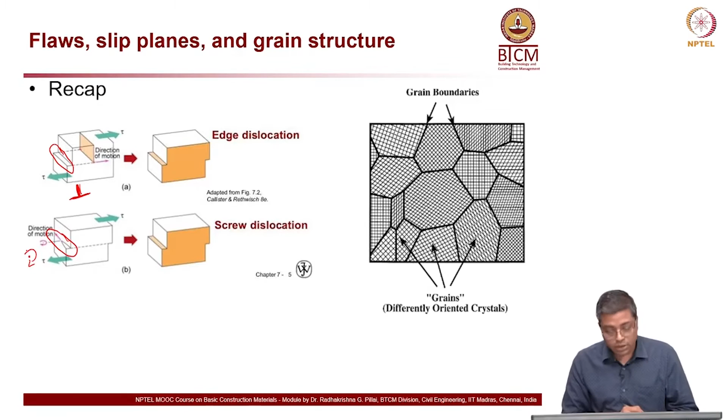Now, how do these slip planes, flaws, and grain structure influence mechanical properties? They do have an influence. Flaws and defects like edge or screw dislocations can be weak locations within the bulk material. Because they tend to be weak, they actually decrease the strength of the material. If there are a lot of defects, flaws, voids, or cracks present, the material will generally have lower strength, and toughness might also be reduced.

This is all associated with the energy required to propagate a crack. If there is a flaw, we can think of it as a micro crack, and there is some energy required to propagate that crack. That energy is the most important thing when we talk about toughness, and it matters a lot in strength as well, because it eventually leads to fracture behavior.

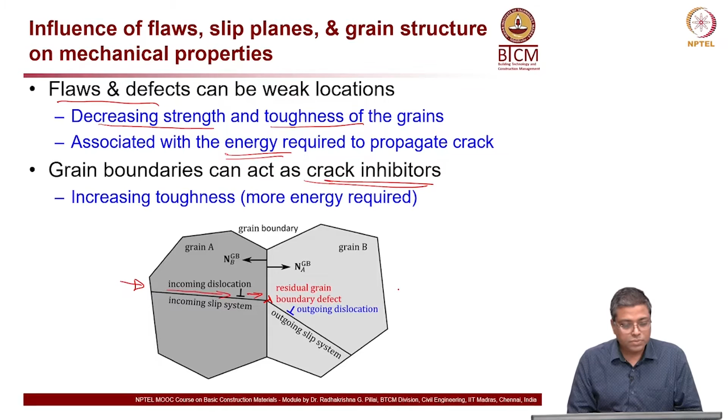Now, effects of slips and grain boundaries — I'll call grain boundary GB here — on toughness and ductility. Atoms at the grain boundaries are at a higher energy state than a particular atom within the grain.

Slips are blocked at grain boundaries. We showed that drawing earlier, repeated here. The slips are blocked because the grain boundary acts as a crack inhibitor, stopping the crack from progressing. But as you apply more stress, there will be a point at which it starts moving in the best possible direction, through the next or adjacent grain available. This process requires more energy, because you have to cross through that grain boundary — you need more energy to deform the material.

Now look at the drawings here. You can see this is an incoming slip plane, ISP, and an outgoing slip plane, OSP. Look at the direction of these arrows.

So these perpendicular symbols are actually the edge dislocations.

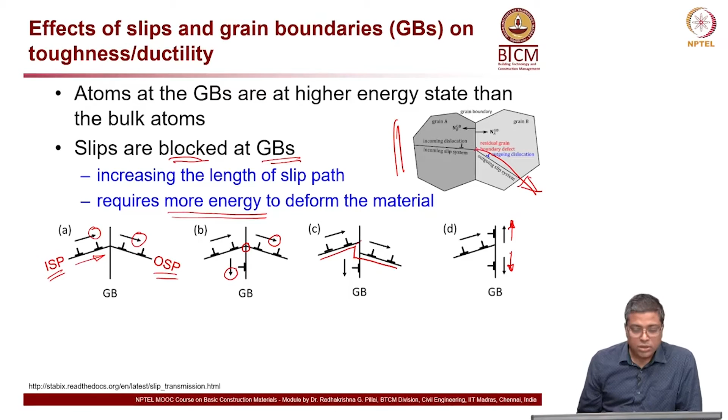Because of this, the size of the grain boundary has an influence on the toughness, we can say that.

Now here, when you look at the left side micrograph, this little straight line is about 100 microns. So you can say the size of this is maybe 1, 2, 3, 4, 5, 6, 7. Let's say 0.8 millimeter is the distance from this point to that point. So you're looking at within a millimeter in size here, not centimeter - within 1 millimeter in size.

Now, on the left side you have larger grains as compared to the image on the right side. Now, when you have larger grains, if you have a crack along the grain boundaries, this is an intergranular crack.

If I measure the length of this red line, the red line indicates the crack, the one on the left side will be shorter than the one on the right side - this is less and this is more. Because when you have larger grain size, the actual length, if you just follow the grain boundary - not the displacement from one point to the other, but the actual length - it will be more in the case of a smaller grain size than in this case.

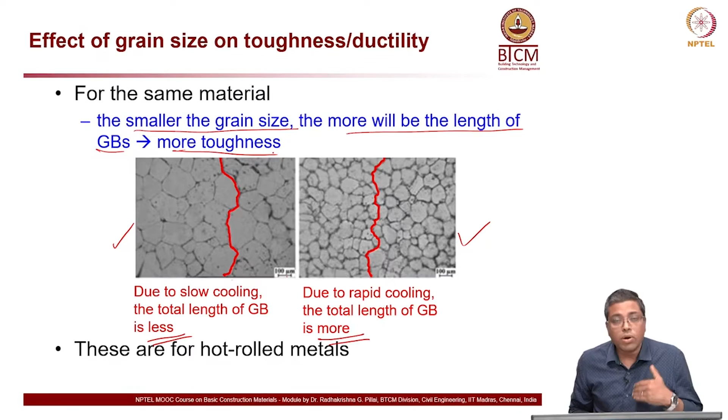So these are mainly for hot rolled metals. If you actually do cold rolling or cold drawing, these are two different major ways by which we do cold working - a common term, cold working or strain hardening, etc. So cold rolling, where you have two rollers and the material comes out through these rollers, whereas in case of cold drawing, you're actually pulling the metal through a die, and you can see the change in dimension or reduction in dimension as the material is pulled through that.

So cold rolling and cold drawing are two different processes, but the objective is kind of similar - mainly to increase the yield strength, that's typically what we do this for. This process changes the microstructure, and in general what happens is with increasing cold work, the hardness and strength increase, and the ductility decreases. Hardness and strength increasing is probably a good property depending on the case, but decreasing ductility is usually not a good idea, because then it becomes a brittle material, and brittle material will have catastrophic failure, which we don't want. So we want to maintain or increase the lost ductility. How do we do that? To restore ductility, heat treatments are done during the manufacturing itself.

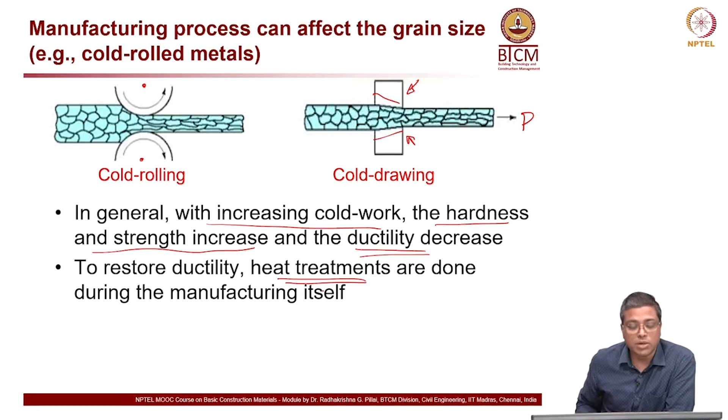Now heat treatment, what is the idea? When you do this heat treatment, it changes the grain size to a desired level as you want. So two major ways of heat treatment which I am going to discuss here briefly are annealing and hardening.

Let us look at annealing first. You have heating and then slow cooling. What happens in this process is, when you heat the material, the large grains which are present tend to break down, and as it progresses, it allows a little bit of grain growth, meaning a new set of grains are formed which could be larger in size. That depends on the rate of cooling. So you are basically rearranging the grains, and this happens not in a molten stage, this happens after the material solidifies. So grain growth, you kind of rearrange the grains to a desired level of grain size.

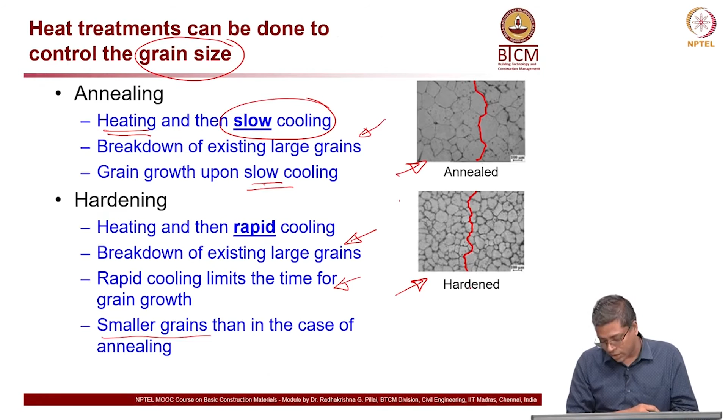For the same material, if the grain size is more, then you will have low toughness. If the grain size is smaller, you might have higher toughness. Now generally when we look at this, heat treatment generally tends to increase the grain size from the cold work stage. So this is the cold working stage, and this is after the heat treatment.

Now look at the graph on the left side. You can see recovery - this is the increase in temperature. There is a recovery happening here, then recrystallization, and then grain growth. The grains recover slightly from cold working, that is the recovery stage, and then at the recrystallization temperature it gains, and then you cool it down. So the grain growth is allowed.

Now look at the dislocation density, first thing to look at. You can see all these light gray lines, they are the dislocations present in the material. Now you have these dark lines here, which indicate the grain boundaries. You can see several grains over there. Now what will happen is the dislocation density decreases as you move to the right, and as you keep heating the material, the internal residual stress decreases as you go through these three phases.

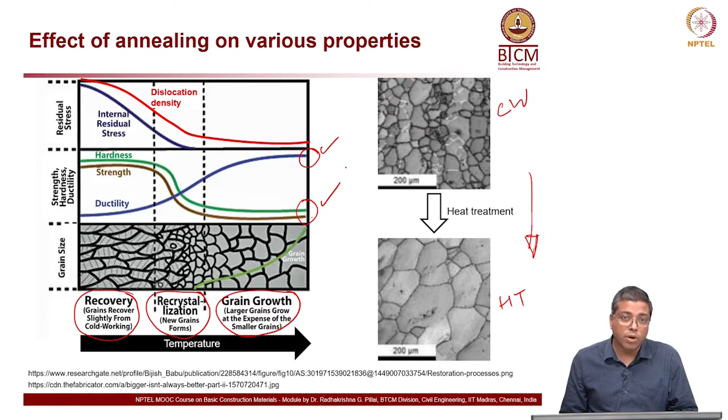Now, let us go into the fourth type of defect, which is volume defect. We started with point defect, then line defect, then surface or plane defect - grain boundaries - and now we are going to talk about volume defect, which are mainly voids and inclusions.

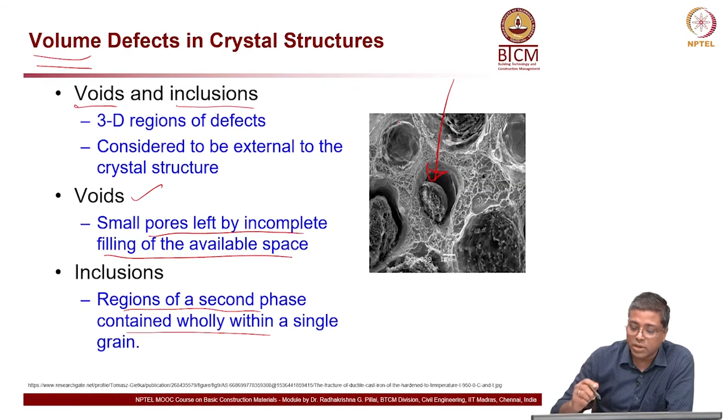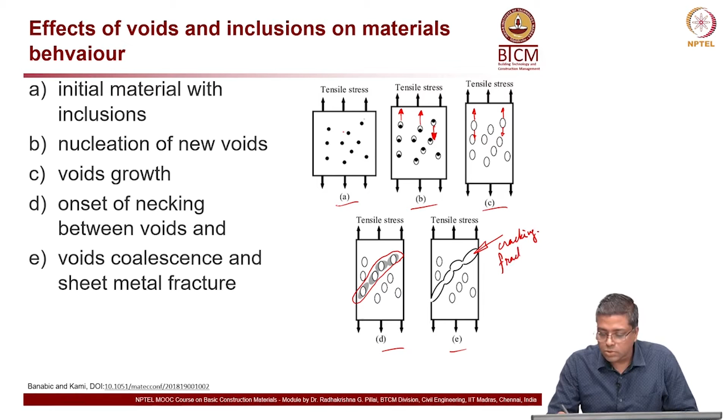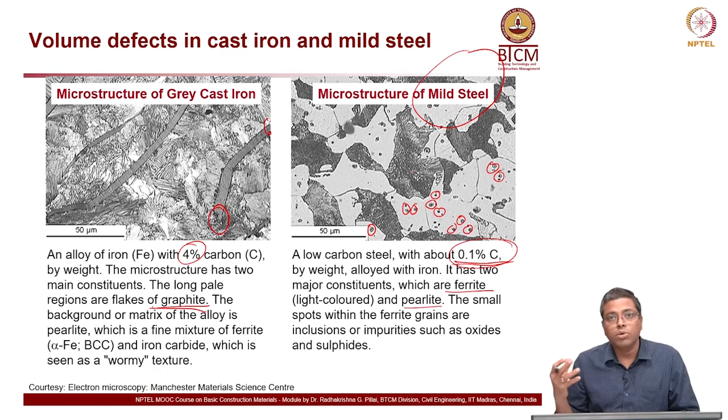Whatever inclusions or impurities are present will have an influence on the failure pattern, because they tend to behave like a weak point when the load is applied.

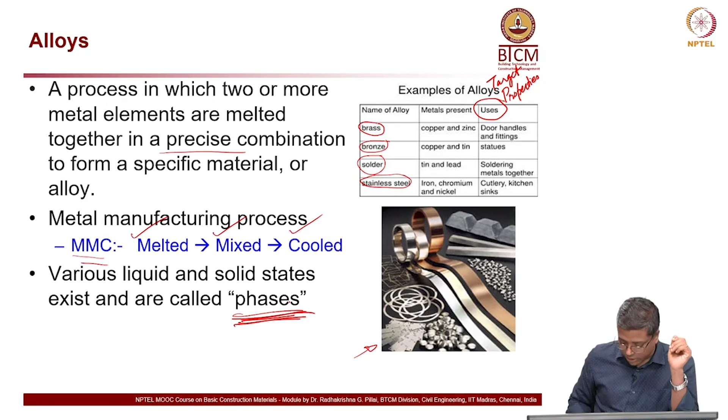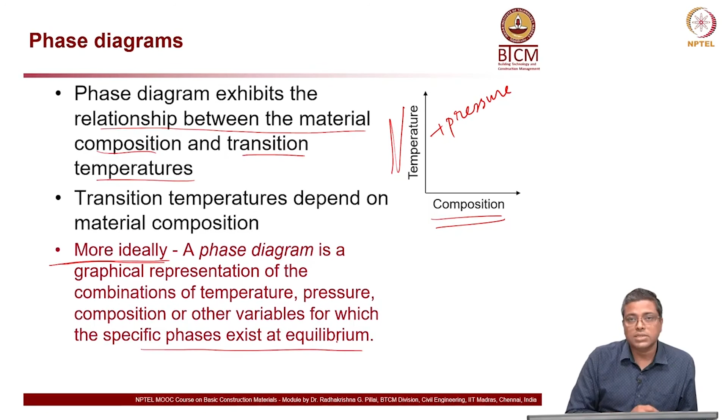More ideally, here I am showing only temperature and composition, but that is not the only thing. Ideally speaking, a phase diagram is a graphical representation of combinations of temperature, pressure and composition - not only temperature, but pressure also comes in, or even other variables for which the specific phase exists at equilibrium. This is what a phase diagram is.

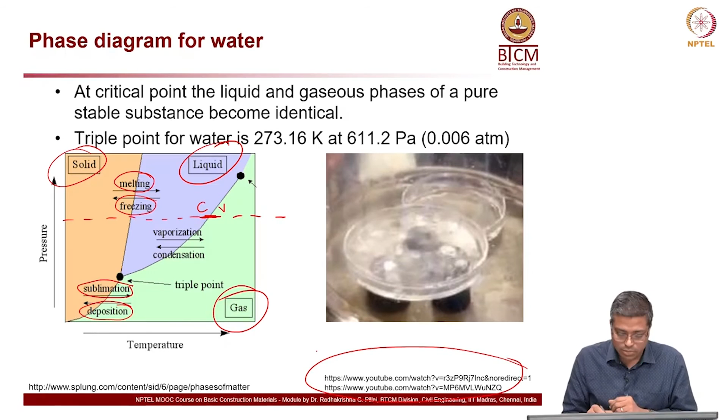We are going to look at solid and liquid in the next slide, but before that I request you to watch these YouTube videos, very good ones on water. You can see ice crystal formation, boiling water, and also gas bubbles bursting, all visible at the same time in the same petri dish used in this experiment. All three phases coexist because different locations in the dish experience different combinations of pressure and temperature, and slight movement in pressure and temperature leads to this change in phase. Please watch this video as an assignment, it's very interesting to see.

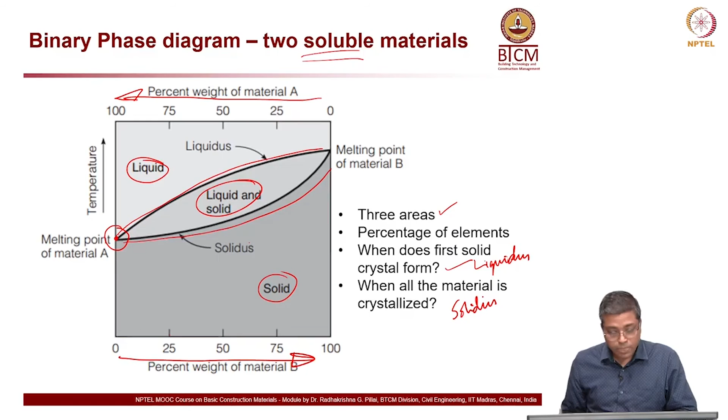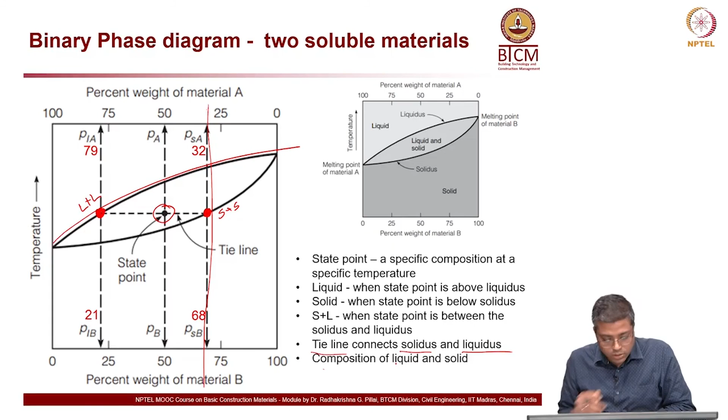This is the liquidus line, and this is the solidus line. So that is also clear now. You have liquidus, you have solidus, and this region is 100% liquid, this region is 100% solid, and this region is solid plus liquid.

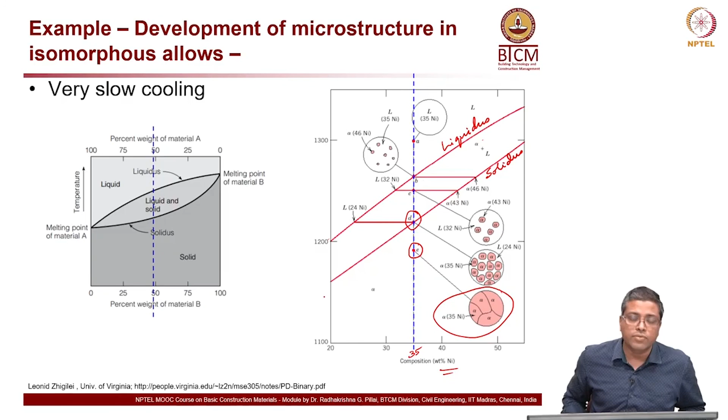To summarize, we looked at plane and surface defects. We talked about grain structure and grain boundaries, and how grain structure, grain size and shape might affect material behavior, including toughness in detail. We also talked about volume defects, mainly air voids or inclusions inside the material. Finally, we talked about phase diagrams of soluble, partially soluble, and insoluble material systems. I request you to go through the textbook. Thank you.